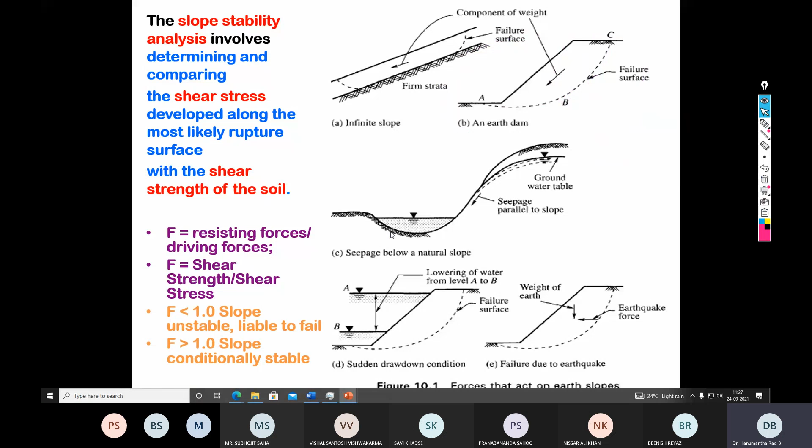So this also I told, and there are two things that we have understood from your undergraduate program. One is natural slopes, next is man-made slopes. Natural slopes are called infinite slopes, while man-made slopes are called cuts and embankments, cut or fill or the embankment, whatever it is.

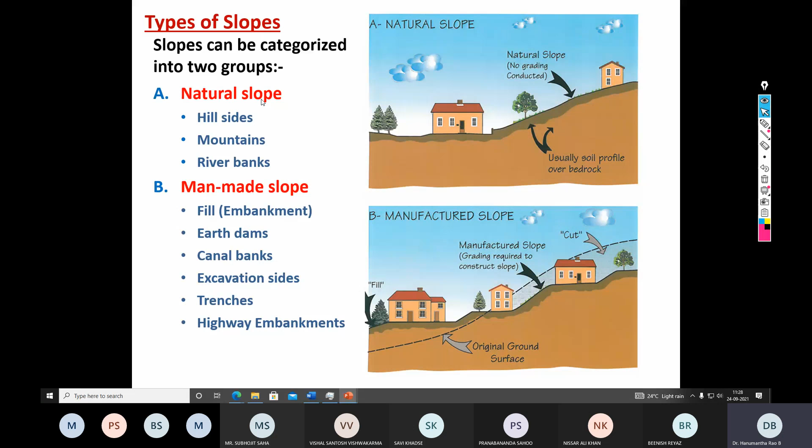Here you can see different examples of natural slopes: hillsides, mountains, river banks. All these fall under natural slopes. Man-made slopes: fills, earth dams, canal banks, excavation sides, trenches, highway embankments. In the natural slope, the length is infinite, while in the man-made slope, the length is known to us. That's why they are finite slopes.

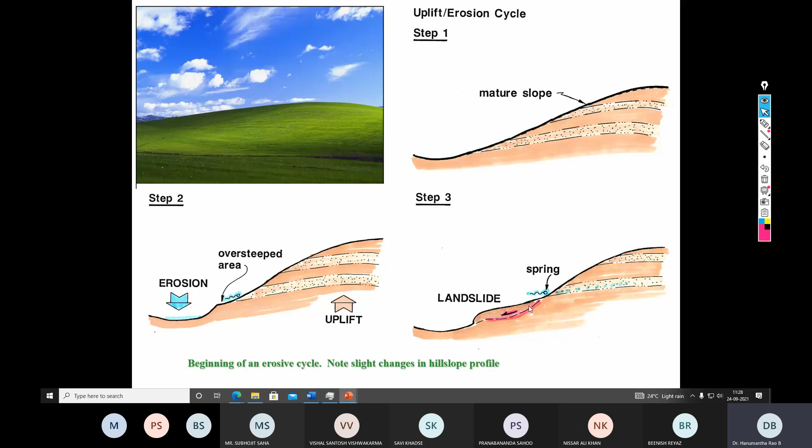So there are different causes for slope instability or landslides. These things are also known to you. A couple of the fundamental reasons are erosion or uplift. Landslide means again slope instability only, or simple movement of the soil. There are some other terminologies also, which I will explain.

And as I told, there are two things: one is shear strength, next is shear stress. So it is desirable to understand the different factors contributing to the increment or decrement in the shear strength or variation in the shear stress. In this slide, a couple of the factors causing an increase in the shear stress have been listed out. Now, suppose the shear stress increases, what will happen to the factor of safety? Will it increase or will it decrease?

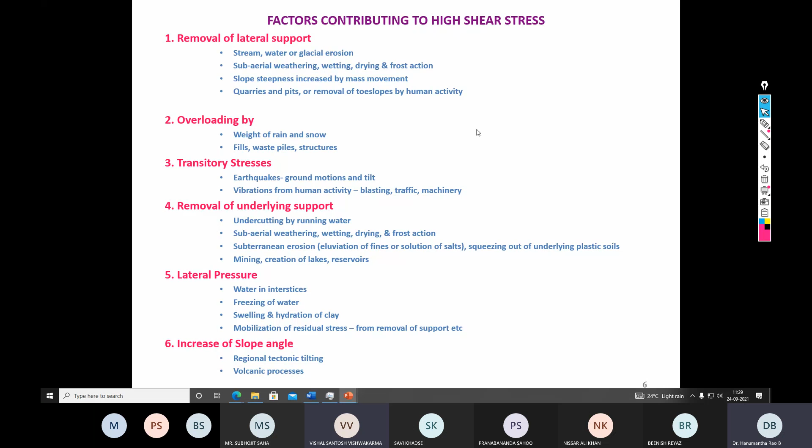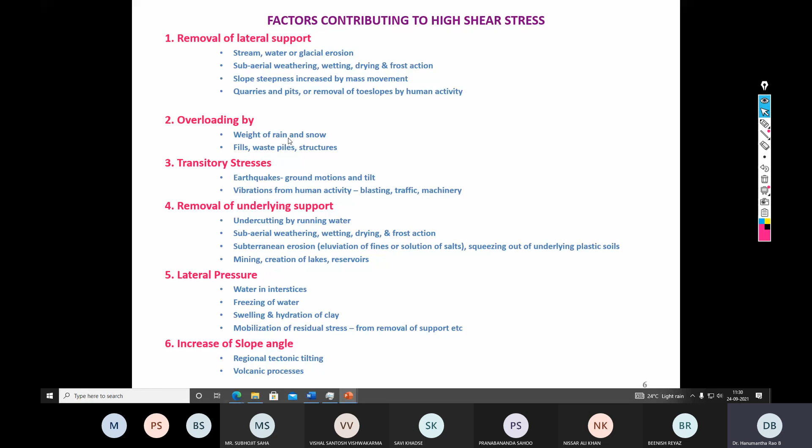Sir, repeat question. What happens to the factor of safety value if there is increment in the shear stress? So factor of safety will decrease. Factor of safety decreases. Now, when you look at these list of factors, you should understand that any improvement or some kind of perturbation in these factors causes improvement in the shear stress and thereby decrement in the factor of safety value. So therefore, when you analyze any slope, you need to understand that nothing is happening to these factors which are causing increment in the shear stress.

Similarly, often you also need to encounter some other conditions where we need higher or lower shear strength. So either you can play with low shear stress or high shear strength, vice versa. So here you can see some of the factors which are causing the low shear strength. So there are factors which are causing the high shear stress, which are not desirable. There are a few more factors which are causing the low shear strength, which are also not desirable. Now, what are those factors? They have been listed here.

So when you understand that the shear strength is decreasing, then you may pay a little attention to what is happening to these different factors which are causing decrement in the shear strength. For example, composition and texture of the material, physicochemical reactions, effect of the pore water, change in structure, vegetation, so on and so forth. So any variation in these factors will cause decrement in the shear strength, thereby decrease in the factor of safety value.

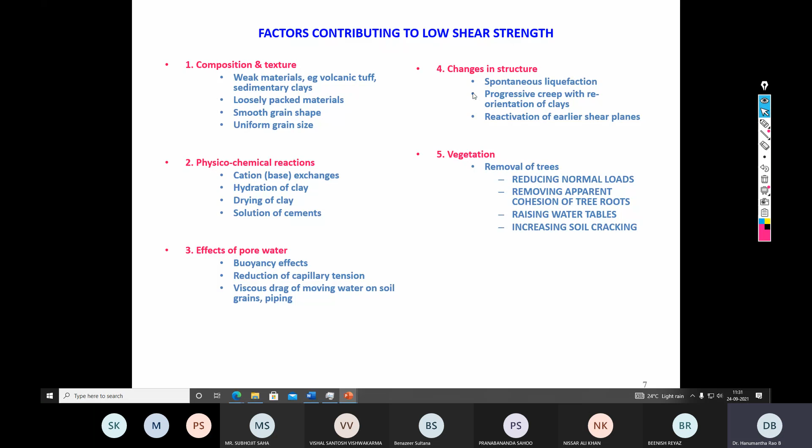Besides the slope stability or the slope failure, a few terminologies that you need to understand are called fall, topple, slide, spread, or flow. These terminologies are valid for geotechnical engineers as well as geology or geological engineering. The people who deal with hills or the deeper soil strata normally deal with all these terminologies. Okay, now in this chapter we typically deal with something called a slide. But if you deal with rock mechanics, then apart from the slide, we also may have to deal with the fall, rock fall.

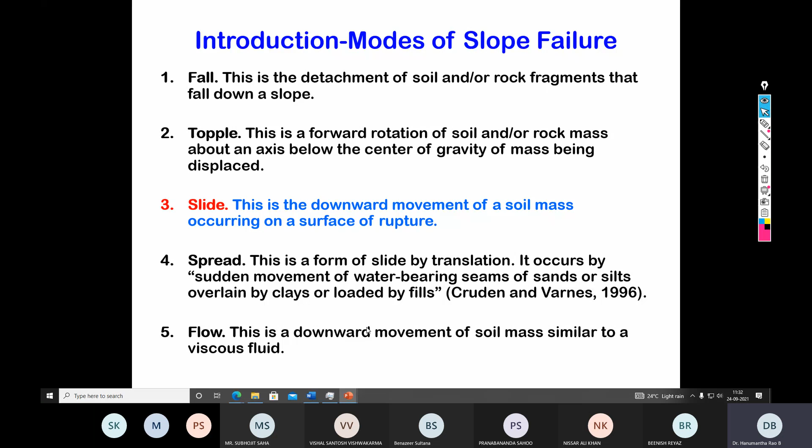Next definition is a topple. Here you can see there are different fragments of the rock or of the soil. If one fragment moves forward in a rotational way, then that is called a topple. This is a forward rotation of a soil or rock mass about an axis below the center of gravity of the mass being displaced. That is called a topple. The topple normally happens for bigger chunks. It will not happen for, for example, soil. It is a particulate material.

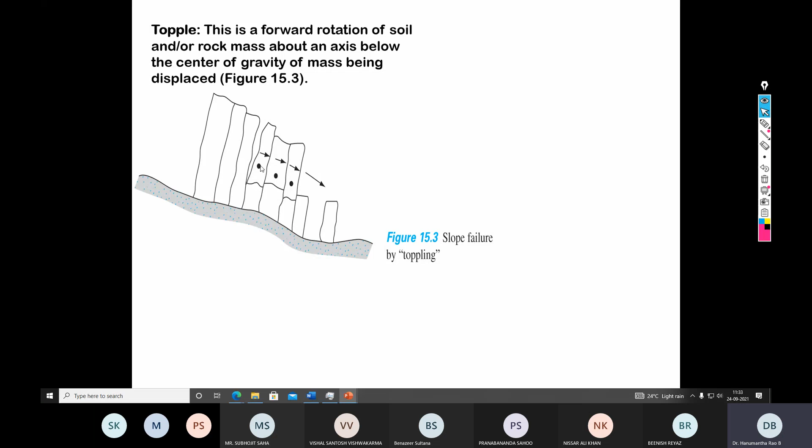Then the typical terminology that is valid in this chapter is slide. Here a big soil chunk, or the soil within a particular area, slides in the downward direction. This is downward movement of a soil mass occurring on a surface of rupture. So that's what is called a slide.

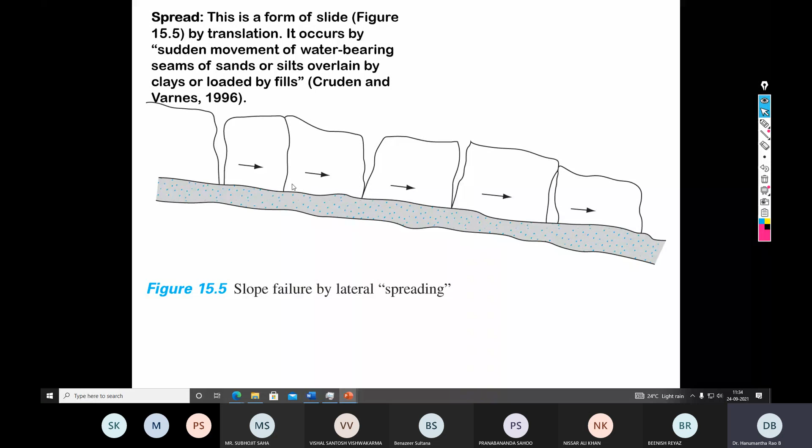Now another definition is a spread. This is a form of slide by translation, but it occurs when there is a sudden movement of water-bearing seams of sands or silts overlain by clays or loaded by fill material. That means a loose material shall exist at the bottom of the denser material. Then only a spread can occur. Then the last one is called a flow.

But when sliding is happening, the sliding is caused by a certain area of the soil chunk. But a flow can originate from a particular point, and that phenomenon continues for a certain period of time, because this is something like a viscous flow. So this is how you can distinguish between different failures like flow, spread, slide, topple, and fall.

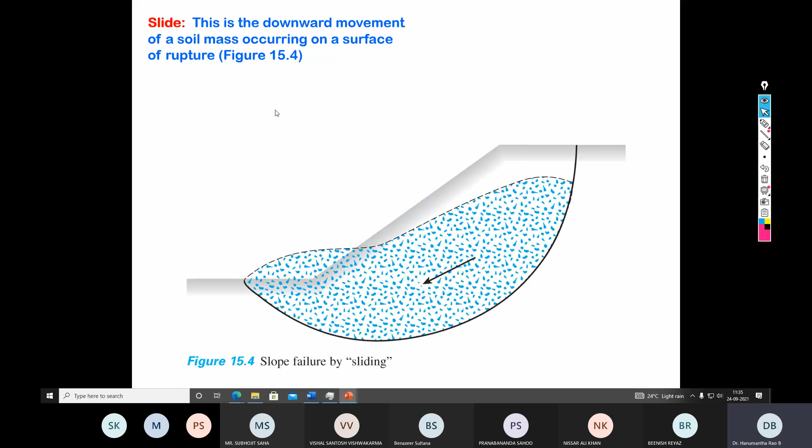If you go to the Himalayas, you can see all these sorts of failures. A rock fall, sliding of a soil mass, toppling of a rock mass, spreading of a rock mass, or flow. Anything can happen. All these can be seen if you go to the Himalayas.

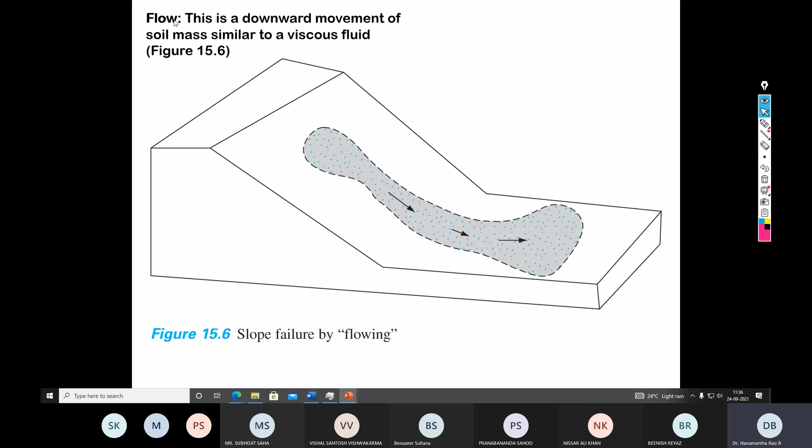The best example of a flow is an incident that recently occurred in Japan, called a mud flow. If you see any YouTube video, it happened just a couple of months ago. If you see the video of that mud flow, it typically falls under this flow. That is not a slope stability failure, or this mud flow has been triggered because of slope instability or as a result of the sliding of a certain mass. So there may be a combination of one with another. Sliding might have caused the mud flow, but this soil chunk mixed with a lot of water, resulting in the formation of a viscous fluid.

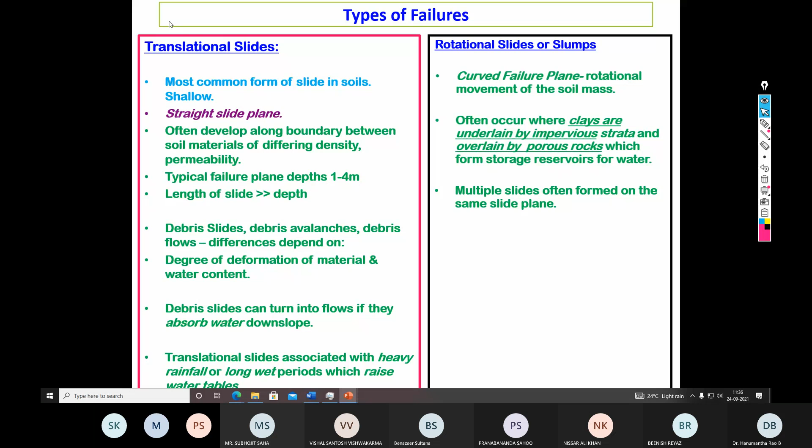Now, in slope stability, we normally hear about two modes of failure of the slope. One mode is rotational slide and another is translational slide. So this is a detailed description of translational and rotational. Translational typically occurs between materials of contrasting density or contrasting permeability, where the failure plane is nearly inclined or nearly horizontal up to a certain depth or length. But in rotational failure, the failure plane is more or less like a circle.

Translational is the most common form of slide in soil, while rotational failure is also common in soil mass. But translational is very common at shallow depth, while rotational could happen at shallow or even deeper depths. When I say shallow, loose material exists for a shallow depth, followed by a denser material. So the translational slide might develop along a boundary between two materials having a contrast in density or permeability. Typical depth of translation is 1 to 4 meters, and the length of the slide is much greater, while that length is absent in the case of rotational failure.

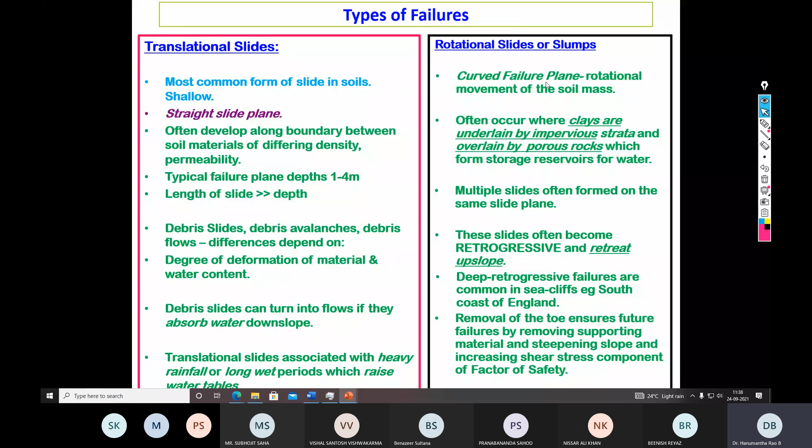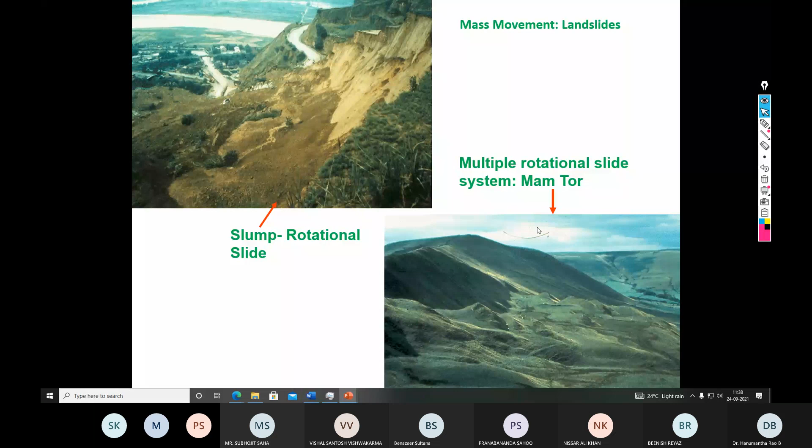Here also, this is a landslide. This is a slump rotational slide. And this is multiple rotational slides, something like a cascading effect. And this is another rotational one. If you look at the failure surface, it is not inclined, rather it is curvilinear. So these are a few features giving glimpses of translational failure and rotational failure.

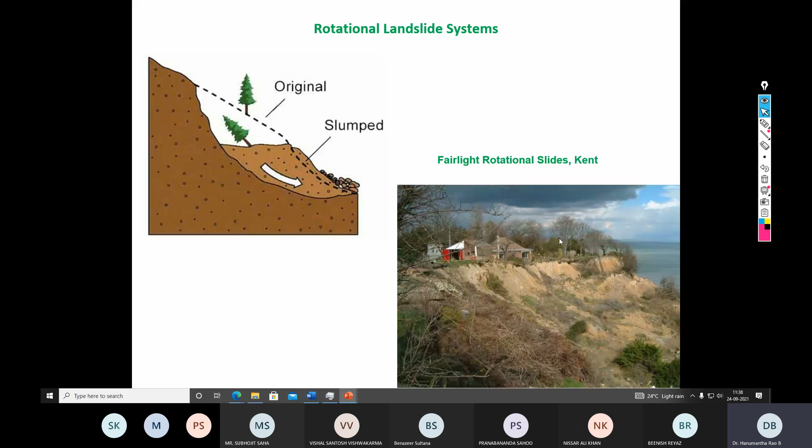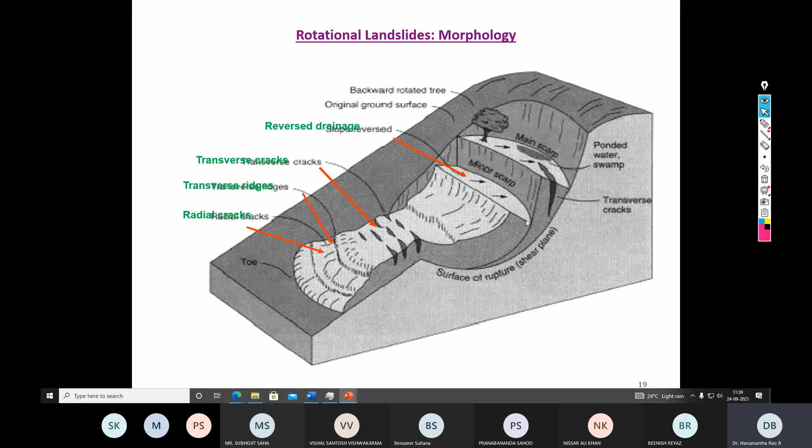This is another example of a rotational landslide. There are different terminologies, and a few more glimpses of the rotational slide. All these typically fall under rotational slide.

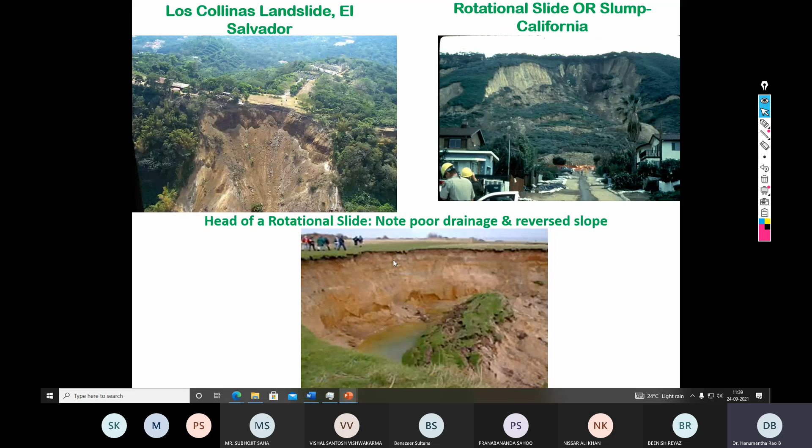Now, this is what we are discussing. This schematic clearly explains the difference between the translational failure and the rotational failure. The translational is also called the planar surface. This translational or planar surface can develop when the soil mass is of frictional material or non-cohesive soil.

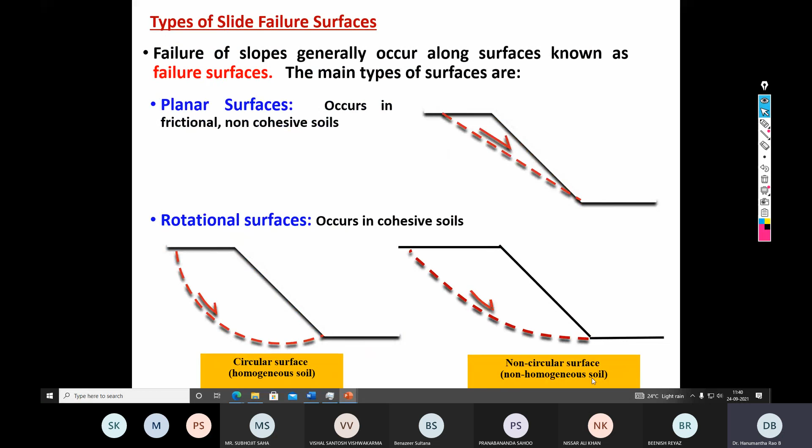If it is a cohesive soil, normally it is dominated by the rotational failure, as you can see here. But rotational is again of two types. It can typically form a circular failure surface or a non-circular surface, and it can fail in any one of these modes. A circular surface can typically happen in homogeneous soil, while if the soil is non-homogeneous, the failure plane may be a non-circular surface.

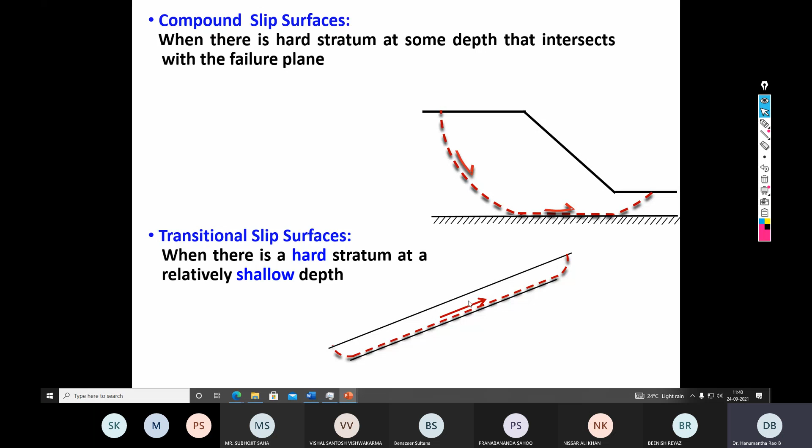Apart from the planar translational, you can also see a compound slip surface, which is a combination of translational plus circular, as seen from the above picture. The last one is a translational slip surface, which typically happens in infinite slopes. So this is a complete summary of different failure surfaces.

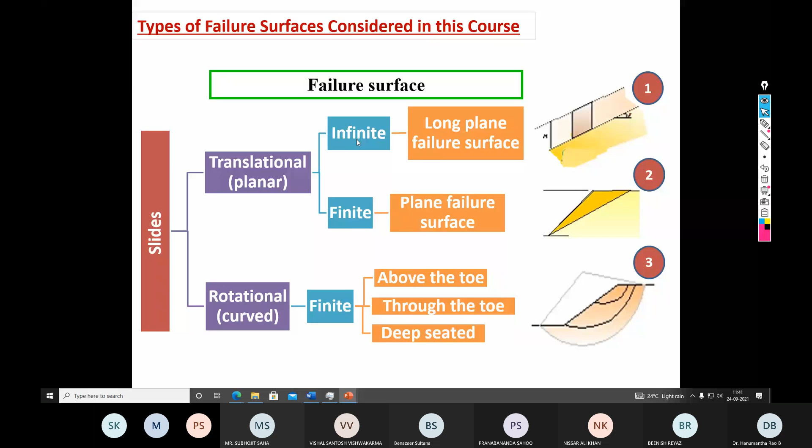These factors may cause failure of a slope individually or in combination. For example, assume an embankment of a certain height. This embankment may be stable under static conditions, but when there is an earthquake, it may become unstable and fail. So here height, that is geometry, is combined with vibration or earthquake. Almost all the factors can be linked with the geometry of the cross section.

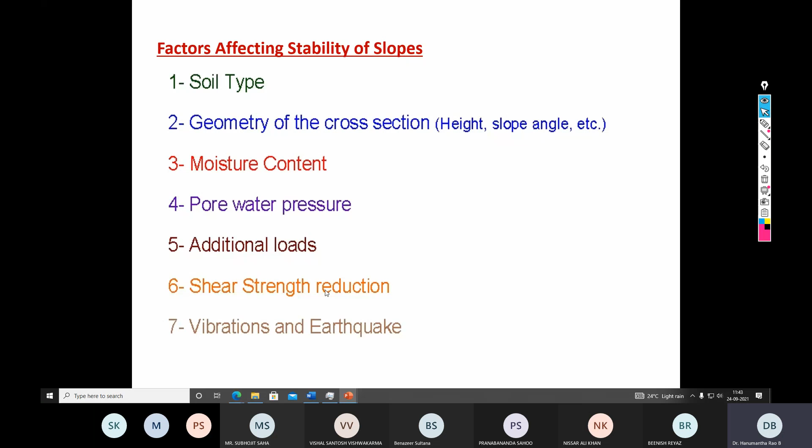In fact, when we determine the height of the slope, we need to take into account all these factors. What would be the moisture content of the compacted embankment soil? Is there any possibility of pore water pressure developing? What purpose is the embankment used for, a canal or a road or pavement? What are the live loads and dead loads? Is any other factor causing shear strength reduction? I have already listed these factors in previous slides, parameters causing high shear stress and low shear strength.

There are two causes that can lead to slope failure: external causes and internal causes. External causes produce an increase in shear stress, like steepening or heightening of the slope, that means increasing the angle of the slope or the height of the slope. Internal causes lead to failure without any change in external conditions, like an increase in pore water pressure.

Therefore, slopes fail either due to an increase in stress or a reduction in strength. These are the two important things you need to understand. When you analyze any slope, you need to pay attention to two things. What factors are causing an increase in shear stress? An increase in shear stress means a reduction in the factor of safety.

Similarly, what are the different... Sir, internal? Yeah.

Sir, sometimes your voice gets stuck, sir. Can you please repeat again? Okay. Maybe because of the network problem. Okay, I will repeat.

So when you try to analyze any slope, you need to pay attention to both the factors: the factors which are causing increase in the shear stress and the factors which are causing decrease in the shear strength. Because one is the numerator of the factor of safety, another is the denominator. So if there is an increment in the denominator, the obvious consequence is reduction in the factor of safety. If there is a decrement in the numerator, the obvious consequence is reduction in the factor of safety.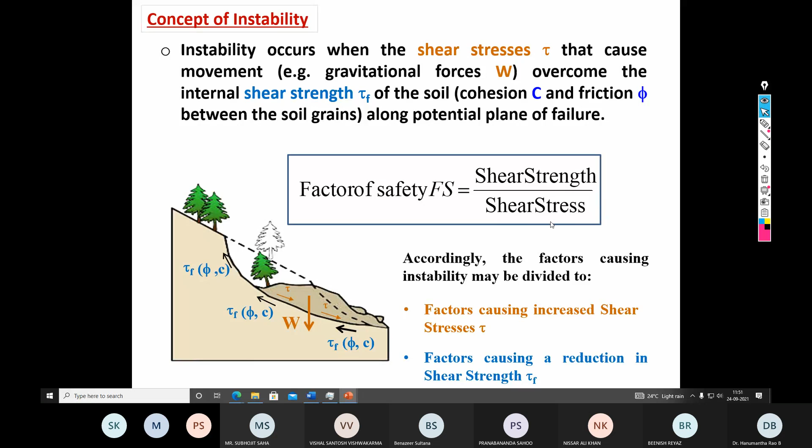So now, how to understand that one? In between comes a parameter called the factor of safety. If you have a very clear idea about the factor of safety, we can easily understand at what value of the strength the soil fails and what is the exact load that you are applying on the ground. This picture will clearly give you a fundamental idea. If you look at the basic definition of shear strength by shear stress, this is how it can be defined in terms of the parameters.

Fs is equal to tau f divided by tau d. Here tau f is linked to the point directly on the Mohr-Coulomb failure envelope. That means this point was determined by literally shearing the soil sample. And tau d is the shear stress that is developed because of the application of the overburden pressure. That overburden pressure is nothing but your normal stress, sigma. As a result of application of this sigma, what is the improvement in the shear strength?

If you look carefully at this graph, I have applied a normal stress sigma n, that is the overburden. Sigma is nothing but gamma into z. When I applied a normal stress of gamma into z of this magnitude, this has resulted in this much shear stress. Now, what is the shear stress at failure? That is tau f. So still this much gap exists. This can act as your factor of safety. This is the margin you are following for the factor of safety.

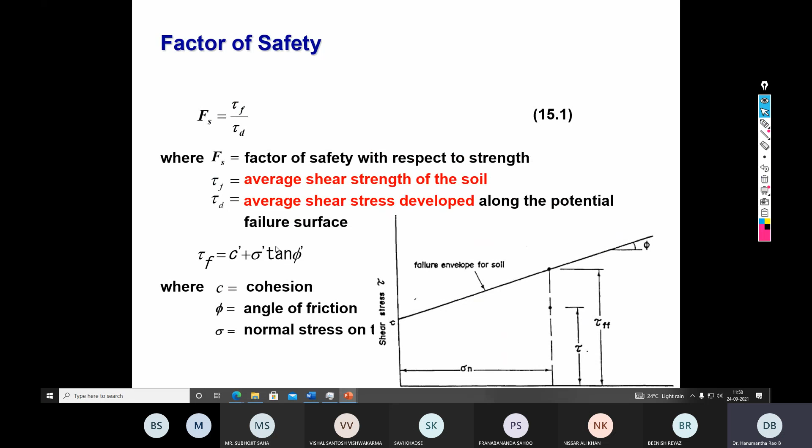So this is further description about the same thing. If you define the factor of safety as tau f by tau d, tau f is equal to c dash plus sigma dash tan phi dash. As I told, this tau f is determined in the laboratory by conducting the triaxial test. On the other hand, there is tau d, the shear stress, which is designated with the same Mohr-Coulomb constitutive relationship, c dash d plus sigma dash tan phi dash d.

However, there are two parameters, c dash d and phi dash d. Those are called the cohesion and angle of internal friction that develop along the potential failure surface. Obviously, c dash d and phi dash d are always less than c dash and phi dash. C dash and phi dash are at failure, while c dash d and phi dash d are at that condition. You might have heard of mobilized cohesion and mobilized shear stress, while c dash and phi dash are the c and phi at failure.

Mobilized means it is the amount of stress required just to initiate or trigger the failure. At that condition, the c and phi are less than c dash and phi dash, where the soil has already failed. Now if you look at these equations, there are two terminologies. We are defining the factor of safety with respect to the cohesion and with respect to the angle of internal friction. Between these two parameters, which parameter is more reliable, and which is not?

To understand that, the factor of safety is further defined with respect to cohesion, that is FC dash equals C dash by C dash d, and with respect to friction, that is tan phi dash by tan phi dash d. Depending upon this, we can assume that the factor of safety with respect to cohesion is equal to that with respect to friction. With this hypothetical condition, substituting, the factor of safety Fs equals the factor of safety with respect to cohesion or with respect to the angle of internal friction.

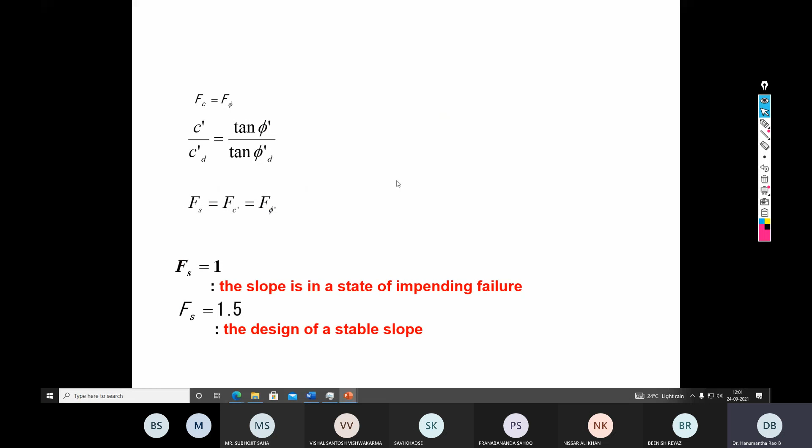So Fs equal to 1 means the slope is in a state of impending failure, on the verge of failure. Fs of 1.5 means it is a stable slope. So this is the very basic understanding about slope stability, or the fundamental definition of the factor of safety, and so on.